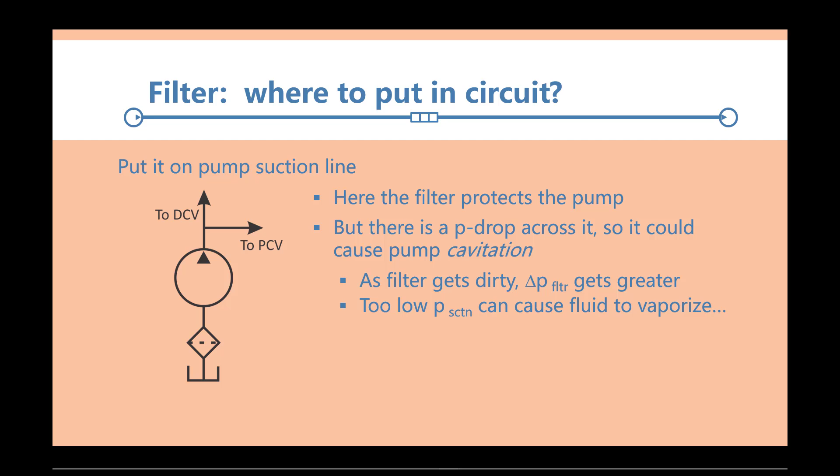And putting this filter here, usually the pressure drop across the filter is not great. But as the filter gets dirty, the pressure drop becomes greater and greater, and so you could actually have a case where you have a dirty filter and such a pressure drop that you actually cavitate your pump. Okay, so what happens is if you get too low of a pressure in the suction of the pump, the fluid can vaporize and make little bubbles, and then those bubbles can cavitate the pump.

So this is a picture actually of a lobe pump that has had cavitation damage. So on the suction side of this pump, for one reason or another, the pressure was too low. The fluid vaporized, and then when you start compressing it in the pump, the bubbles collapse and they actually erode the pieces of the pump. Okay, so you want to avoid that at all costs. So that's a disadvantage of putting the filter upstream of the pump.

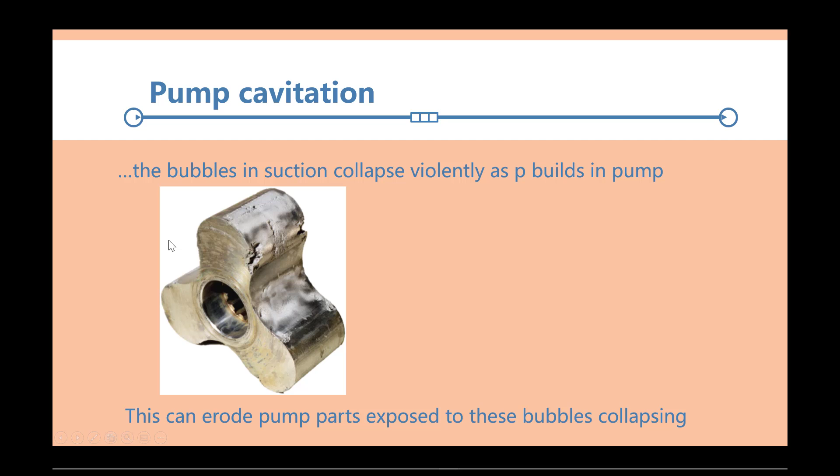One good thing about putting the filter upstream of the pump is that it's a low pressure line, and so you can use a low pressure filter, which often looks like a regular oil filter on a car. Those are not pressurized filters, so at a low pressure you can use a low pressure filter, which are much cheaper than a high pressure filter. Okay.

Now if you want to avoid the cavitation, obviously, you can put the filter on the discharge side of the pump. Problem is, it doesn't protect the pump from any kind of trash or contamination in the fluid in the reservoir. So that's the danger. It does protect, though, the directional control valve and the pressure relief valve. Oh, that should be an R there, sorry. Which are expensive, delicate pieces of equipment, often with small passageways in them, so they're vulnerable to damage or clogging by contamination.

Problem is you have to have a more expensive filter. So you need a high pressure filter, which is a more expensive proposition than a low pressure filter. It doesn't contribute to pump damage from cavitation, so you don't have any pressure drop across the filter in the suction line of the pump.

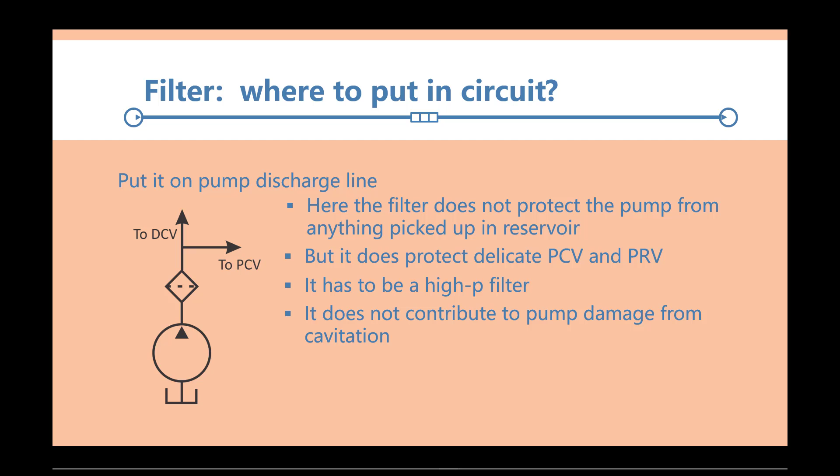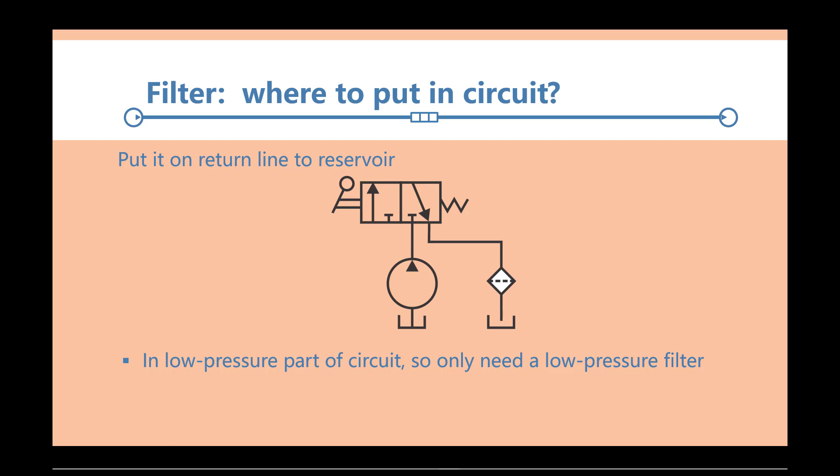We could also put the filter on the return line back to the reservoir. Now, the good part about that is it's in the low pressure part of the circuit, so you only need a low pressure filter again. Okay. It also does not contribute to pump damage from cavitation. You don't have a filter with a pressure drop on the suction line of the pump,

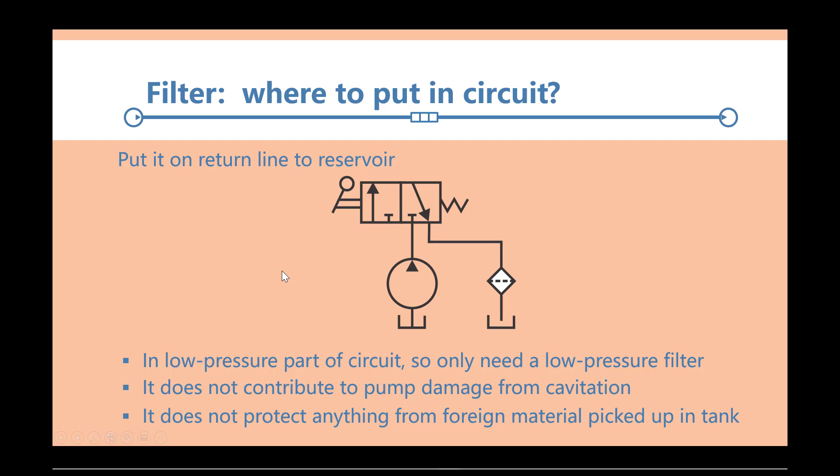but it doesn't protect your delicate pieces of equipment, your valves. It's only filtering out the contaminants that you get as the fluid returns back to the reservoir. So that's the disadvantage of this placement of the filter in the line.

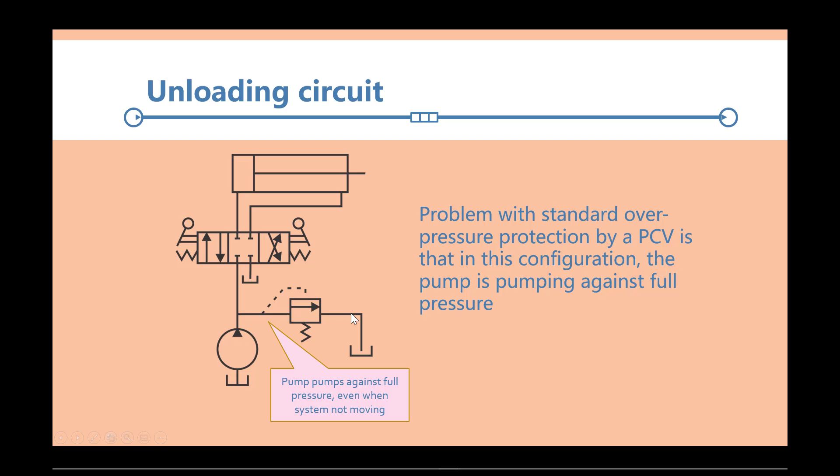So there's ways to deal with that. This is our full pressure here. This pilot line pushes the envelope down so that we have a flow through the pressure relief valve into the tank. What we can do is we can add a check valve on the discharge line of the pump. So when we're actuating or retracting, then the fluid would go on.

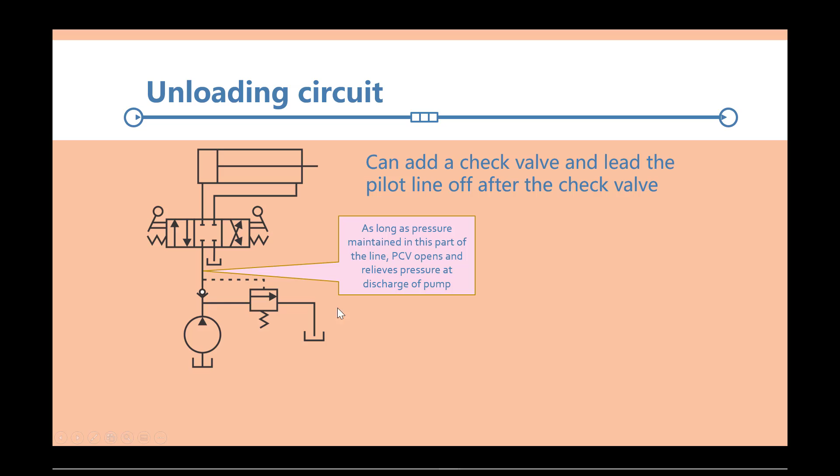Okay, so this is a nice way. It's called an unloading circuit. The pump discharge is ported directly to the tank, so we don't have a big buildup of pressure here. We don't need it, and we can still have the system pressurized. And then we save the oil also from being heated up, and actually that's one of the primary ways to damage oil, to overheat it.